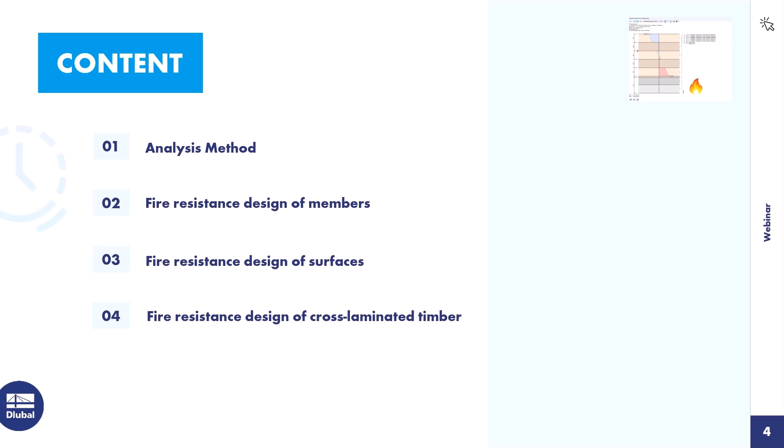We will not model anything today. We will switch to the program and I will show you the settings directly in the program. But the main focus today is the theory, so that you will understand what the background of the Eurocode is, how everything works with the charring and with the design afterwards. So we start with theory, then we switch over into the program, we check a few members, we check the design of surfaces, and at the end we will design cross-laminated timber for fire design. Okay.

So the first topic today is about the general requirements. This content here comes from the Bavarian building regulations, and I am sure it is similar in your country. It does not make sense to have a more detailed look into any regulations because we have so many people here from so many countries and every country is a bit different. But I guess in general this sentence says everything, so that's why I read it.

Buildings must be arranged, constructed, modified and maintained in such a way that the outbreak of fire and the spread of fire and smoke are prevented, and that in the event of fire the rescue of people and animals and effective firefighting operations are possible. And I guess it is clear to everyone that this is our big aim.

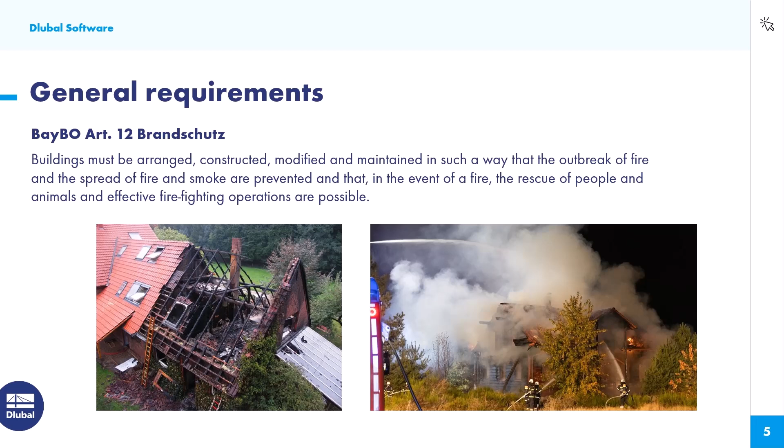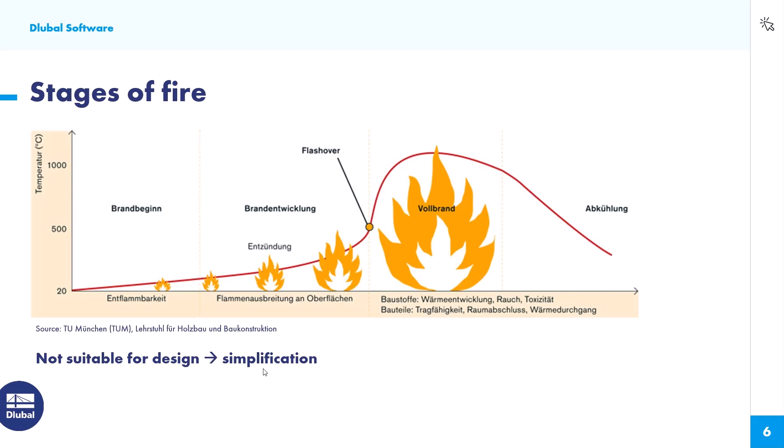Okay, so then we need to talk about stages of fire. The first stage is the non-flaming smoldering before it goes over to the developing fire stage. Then we get the flashover where we receive the fully developed fire before it comes to the decay stage. And of course, when we think about this red curve here, you can imagine that this is hard to simulate in a structural analysis. That's why we need a simplification, and how this simplification looks, you will see in the next slide.

It's the content of the Eurocode 1, of course not the whole content, but the important content. It's about nominal temperature time curves. Here we see the standard temperature time curve. There are a few more temperature time curves, but for timber and especially for buildings, only the standard temperature time curve is of interest. That's why only it is listed. We see the equation of the time curve. It's a logarithmic function, and the variable is t.

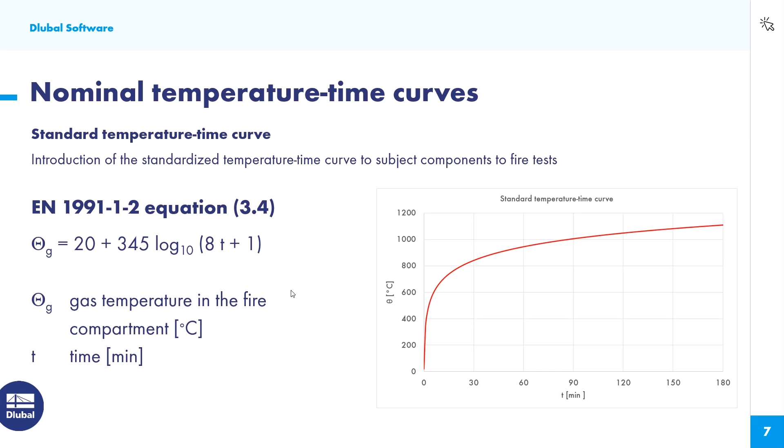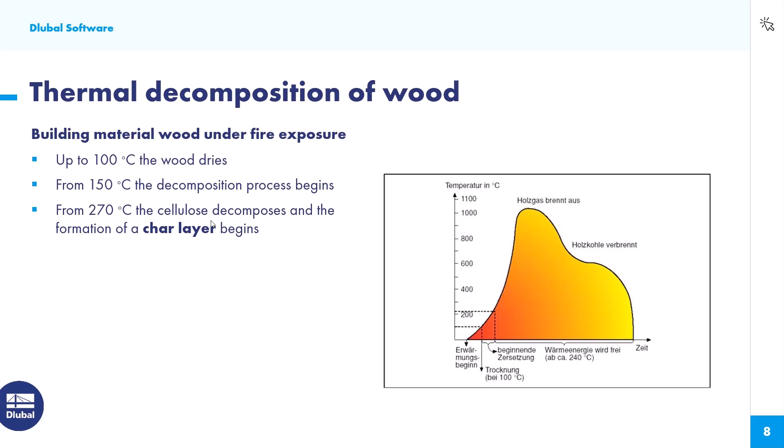The next slide is about thermal decomposition of wood. I guess it's clear to everyone that in the beginning the wood begins to dry. This is up to 100 degrees Celsius. From 150 degrees Celsius, the decomposition process begins. So we are around here. And it has its peak at around 270 degrees Celsius, where the cellulose decomposes and the formation of a char layer begins. And this char layer plays an important role, and it's actually the key for our timber design. That's why it's in bold letters.

A few properties of this char layer. This char layer has a lower thermal conductivity than unburned wood. That's why it delays the charring, and hopefully a residual cross-section remains. And that's the reason why we have a very favorable behavior during fire in case of timber. As you see here, when you check the cross-section after a few minutes, I don't know how many minutes these are, maybe 30 or 60, you will see that the timber inside is still brand new.

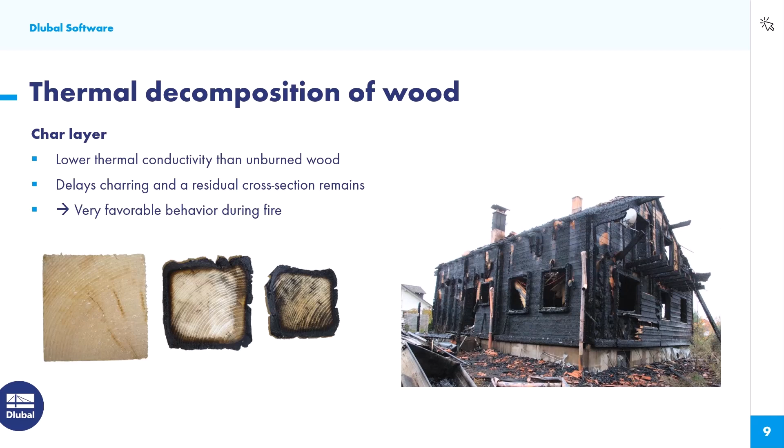Fire resistance classes. I don't want to spend so much time on it, since I guess that's clear to everyone. We have these classifications. We have load-bearing components and non-load-bearing components, but of course we are focusing on the load-bearing components in our structural analysis. And we need to consider integrity or not. That depends on, of course, the building code or whatever.

In the new Eurocode, this plays a more important role, and we are also focusing on it in the future, but for now we have no integrity. Or we do not prove any integrity, since it is actually not a design check in terms of structural analysis, but as I mentioned, it becomes a more important role in the new Eurocode.

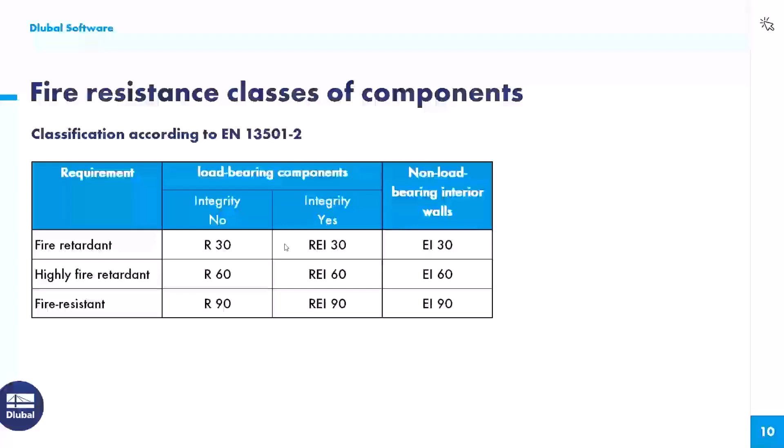Fire retardant, highly fire retardant, fire resistant. I guess that's clear to everyone. We talk about R30, R60, R90, R120, and so on. The indexes here are described on the next slides. I don't want to spend much time here. Please check the video afterwards and pause it. You will be able to read in detail what we're talking about. Today we're focusing only on the load-bearing capacity.

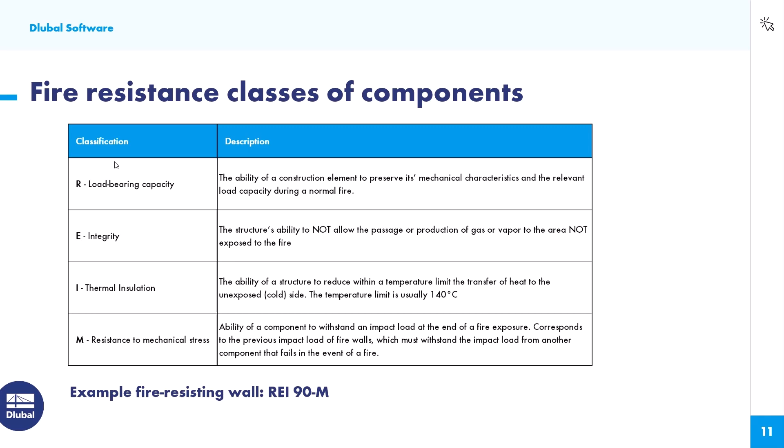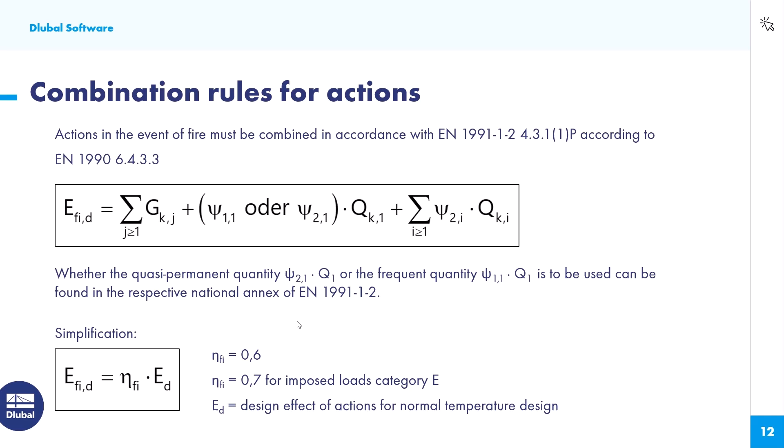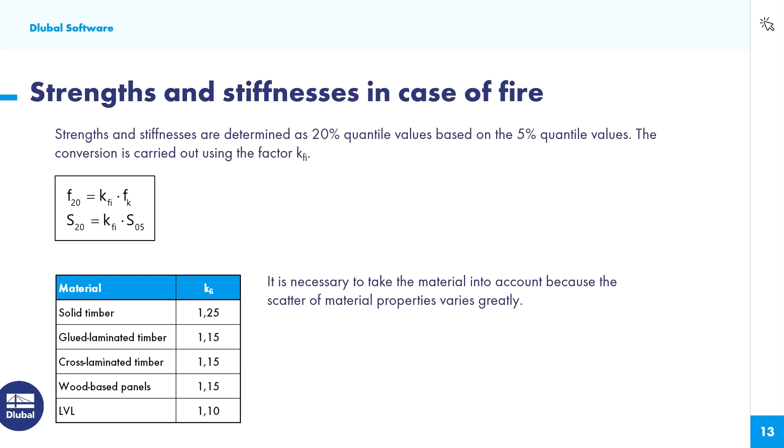And you see the 20% quantile value is dependent on the material. It depends on the scatter of the material properties, because it varies greatly from solid timber to glulam, for example. And I guess it's clear that the properties scatter because of branches, cracks and whatever. Okay, that's it.

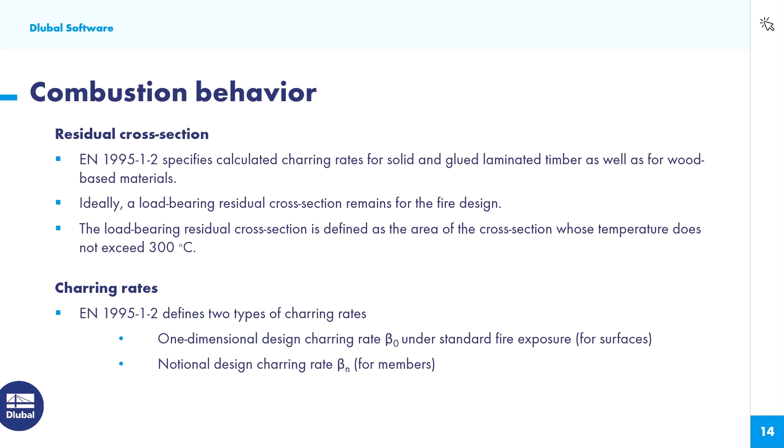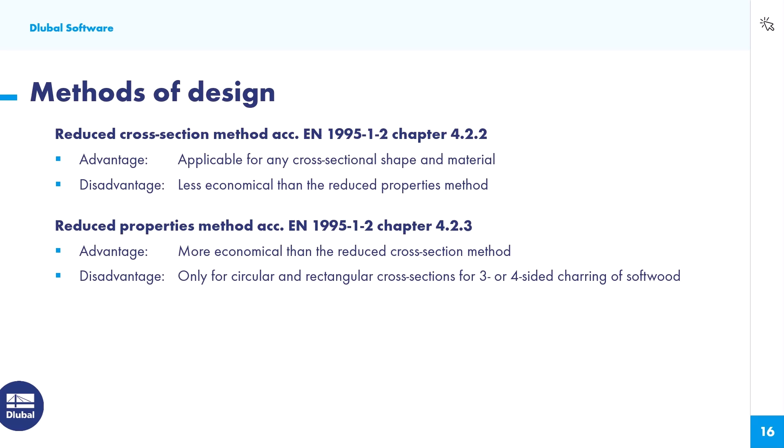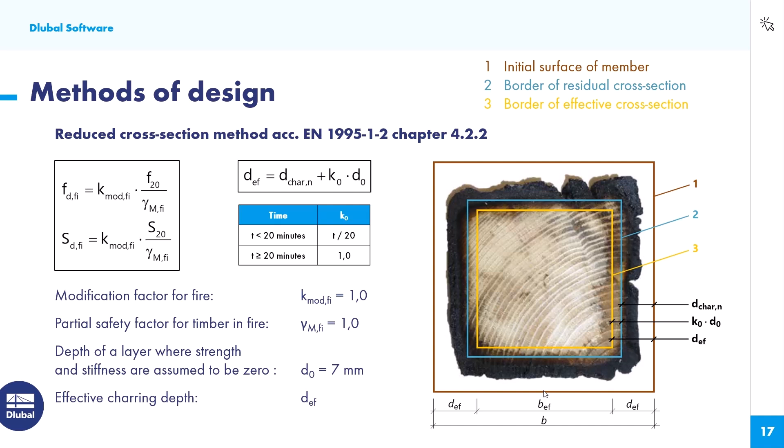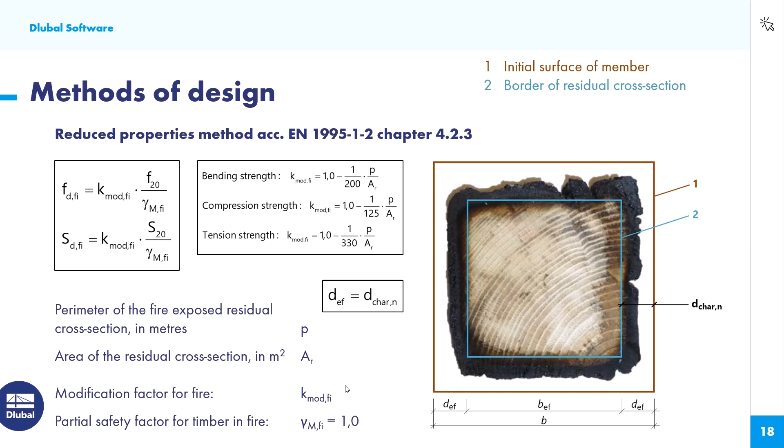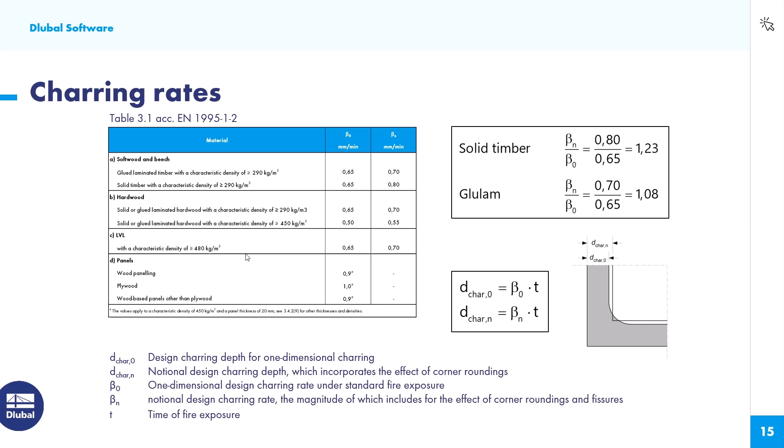Okay, that's it. Let's do a small example for this ceiling beam, which is softwood C24, 140 by 240 millimeters. Fire resistance period should be R30, and the charring should be at 3 sides: left, right, and bottom side. So we calculate our charring depth, multiplying the beta n factor from table 3.1. It's this table. Solid timber, which is C24, we have 0.8. Multiplied by the time, in this case R30, means 30 minutes.

We get 24 millimeters. And we additionally add 1.0 times 7 millimeters. And then we get an effective charring depth of 31 millimeters. Now we take the 31 millimeters 2 times and reduce it, and we get 78 millimeters for the width. And for the height, 240 millimeters minus 1 times 31 millimeters equals 209 millimeters. Actually, it's really simple. Okay, then let's switch over to RFEM.

So I'm sorry, maybe I should... I'm sorry. I have loaded the wrong files.

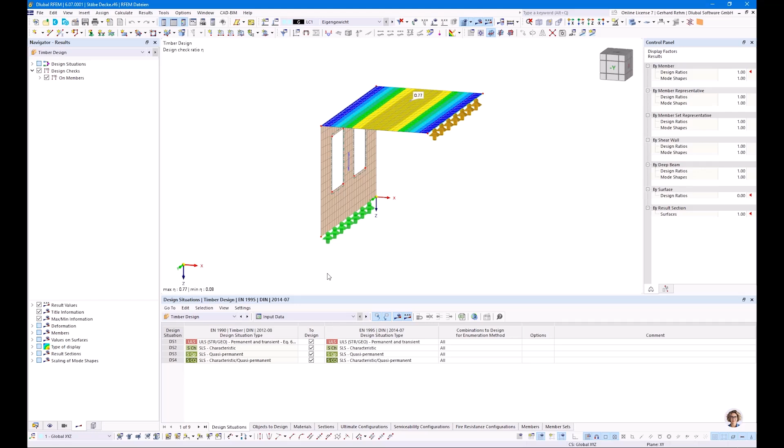Because they were already finished, and of course I want to start directly when our ULS and SLS design is fulfilled. So we see this floor here. I have shown this floor with different variants in another webinar, I guess a year ago or something. You will find this webinar also on our website. And now, of course, I want to extend it for fire design.

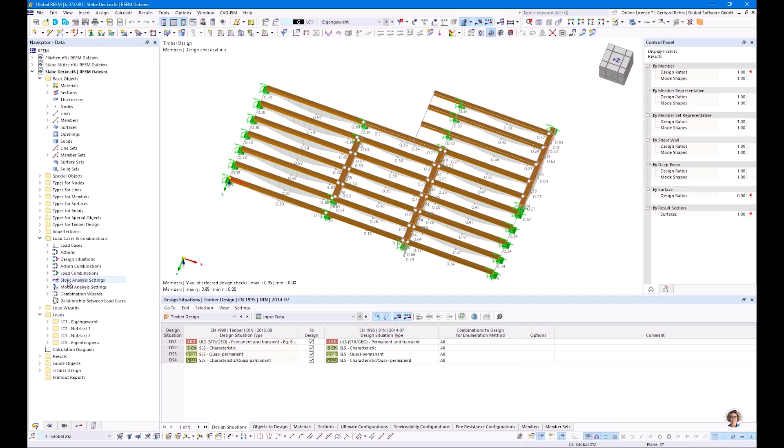And what we will do is we will add an additional design situation, because we need our actions in case of fire. Okay, so I added the design situations here, and I will add another design situation. In this case, I select accidental fire. Watch out, there is also accidental without fire, but this should be used for example for an impact load or something. In case of fire, please use this one here. It depends on the national annex.

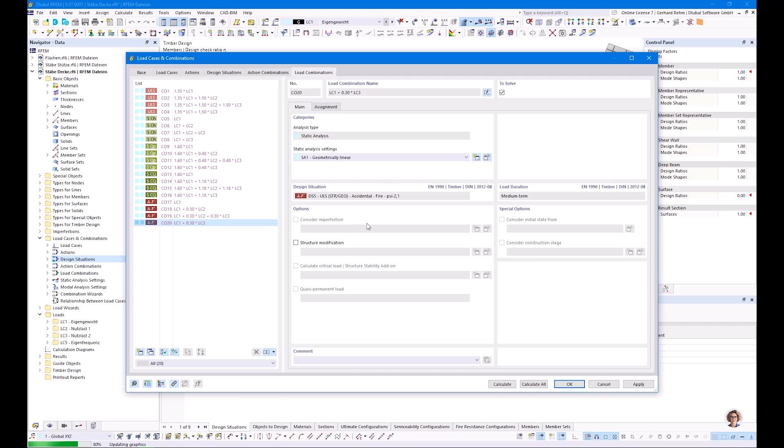Since we have only imposed loads, and I use the German annex, I will use psi 2 in this case. Okay, and then we get our load combinations for ULS, cold state, and also the fire state, where we have imposed loads, dead load, and imposed loads on different spans. Okay. Of course, timber design results need to be deleted. We want to add fire design here.

All right, let's have a look on the floor beams. In this case, fire resistance config was automatically assigned to it. So in case you don't receive any results for fire design, please check if a fire resistance configuration was defined here. Let's have a look on it. Okay, so there are different tabs for members, surfaces, and some standard parameters. So in this case, it's exposed to fire on 3 sides, so not the top side. And we check it against 30 minutes.

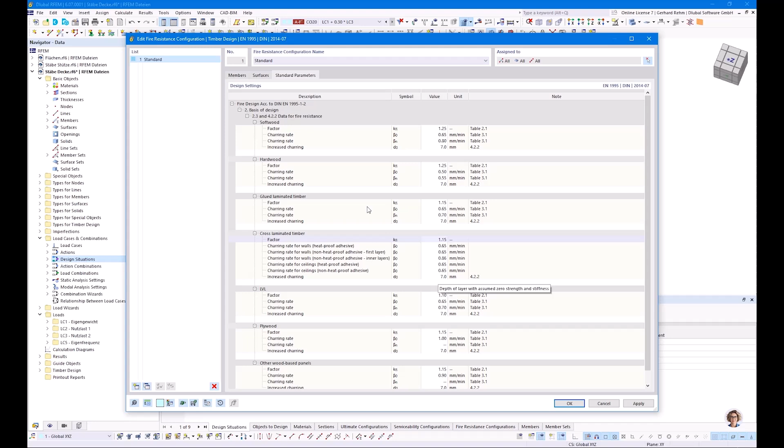And when we switch to standard parameters, you will see all these beta factors for different wood and for different timber material. Okay, and you are able to change these values in case of some special settings from some special approval or something. Okay, so that's actually it.

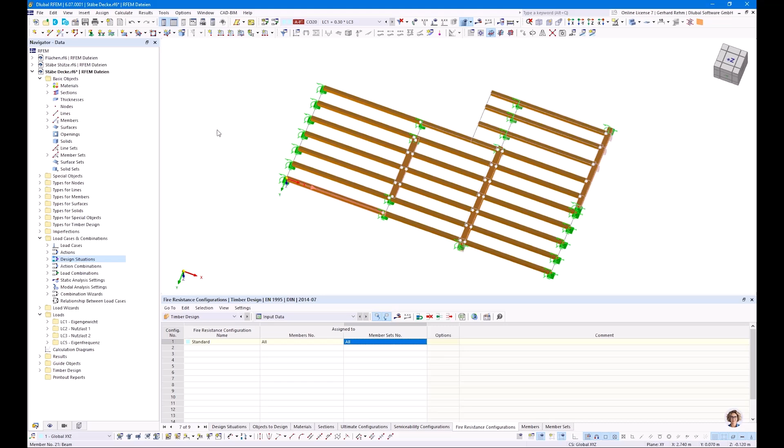So here we can also check which fire resistance config is assigned. So in this case, this config 1 is assigned to all members and all member sets. Of course, if some member has a different setting, you can simply switch it here in this design configuration tab. And here you can also create new configs. Okay, so that's it, I guess. For now, I will run the analysis.

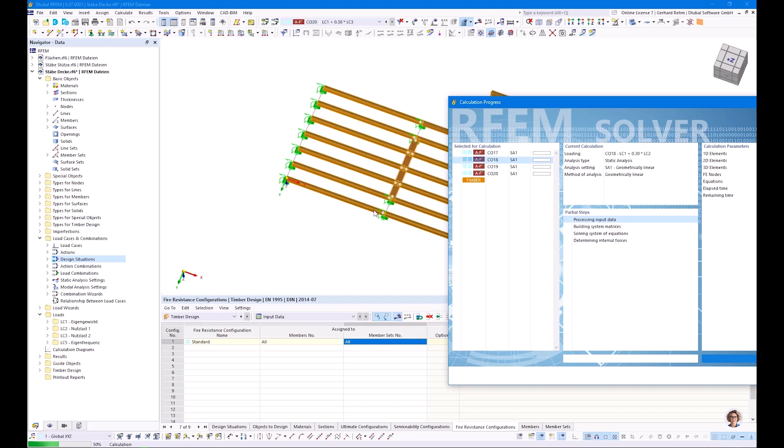And then we will check and compare, because the floor beams here, the ceiling beams, have exactly the same section like my hand calculation. So we had 140 by 240 millimeters. Okay, so let's focus on, it does not matter. We don't take care of the numbers for this example. Let's check this member here. And we check fire resistance. Let's check bending. And let's have a look at it. So it's not so, so interesting.

We only see how the characteristic value is transferred into the 20% quantile value. So we increase the strength, the characteristic one, by factor 1.25. So that's okay. And k mod fire is 1.0, and also the partial safety fire factor is 1.0.

Here we get the information about the fire resistance. So we have a t required of 30 minutes, and we have beta n of 0.8 millimeters for this material, multiplied by 30 minutes equals 24 millimeters. We add additionally the 7 millimeters, and we get an effective charring depth of 31 millimeters and an effective section of 78 by 209 millimeters, which was exactly the same value like in our example here. Okay.

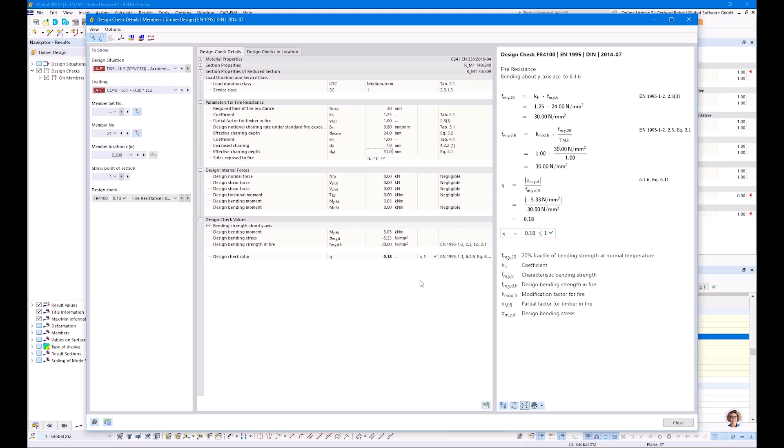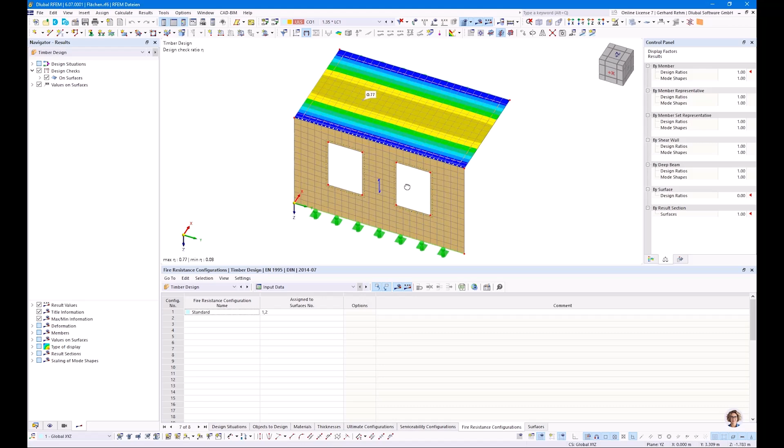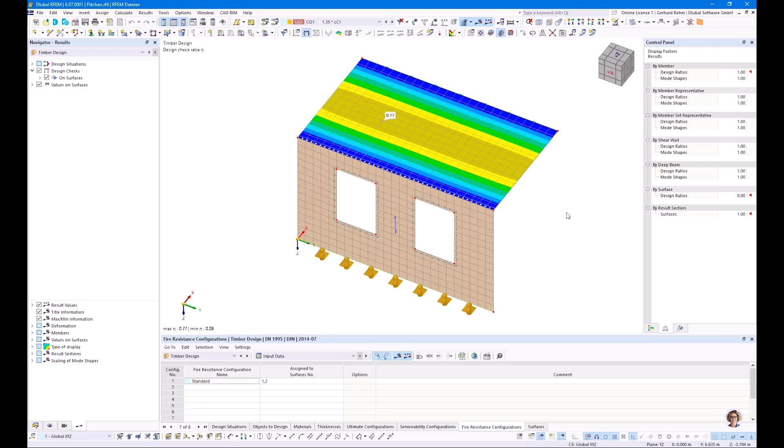Let's go directly to the next example. It was this one with surfaces. So there's a small additional building next to another building, but the other building was not modeled. So that's why I have this fixed support here on this side. There is a line hinge here on this side, and there is a support here on the wall on the bottom side.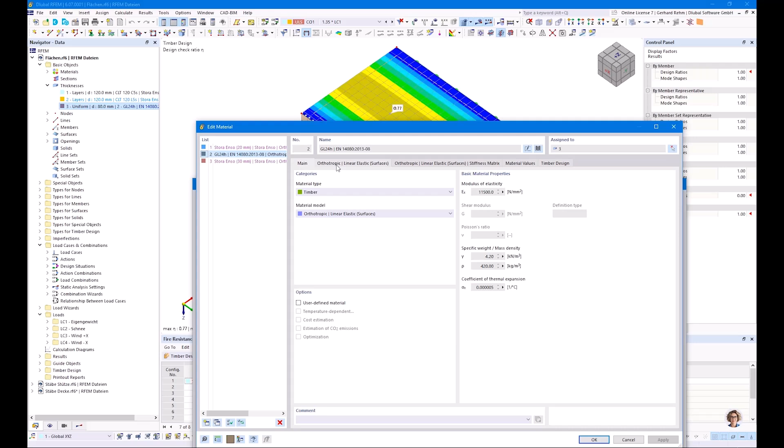So this floor here was made of an 80 millimeter glulam floor. So it's an orthotropic material model. So let's have a quick look on it. So I've switched to orthotropic linear elastic surfaces, where we have a different modulus in X and Y direction. Of course, this is made of multiple pieces of glulam. So maybe 80 by 625 millimeters or 620 millimeters or something.

And of course, there should be no moment transfer in Y direction of the surface, but since we span it directly in one direction, there is no big difference. Of course, if there is another support here, then maybe we should think about reducing the stiffness in Y direction or adding some line hinges, but for this example, it's absolutely okay.

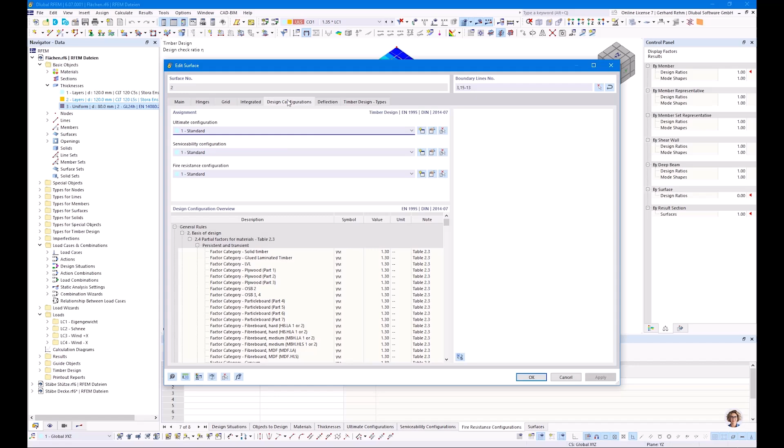Okay, so what I have done here was I have defined some fire config for surfaces. So we check it. Let's check it against 90 minutes. To make some extreme example, you can imagine we have 80 millimeters and we expose it to fire for 90 minutes. Yeah, you can imagine what happens. And we want to have the fire only exposed on the bottom side. So that's all what we enter for now. We come to all other settings later.

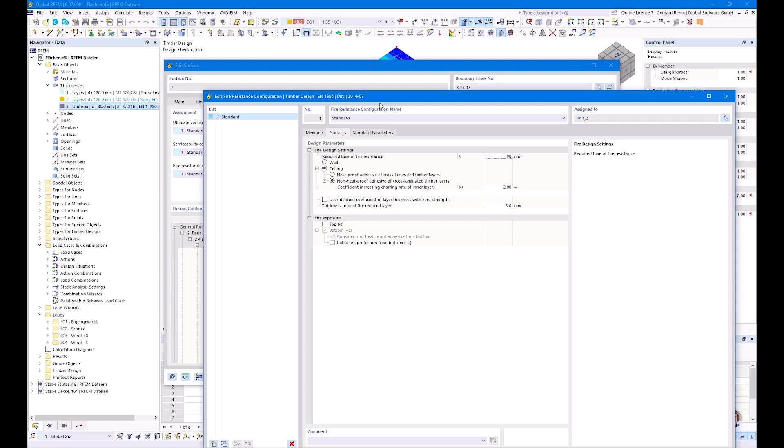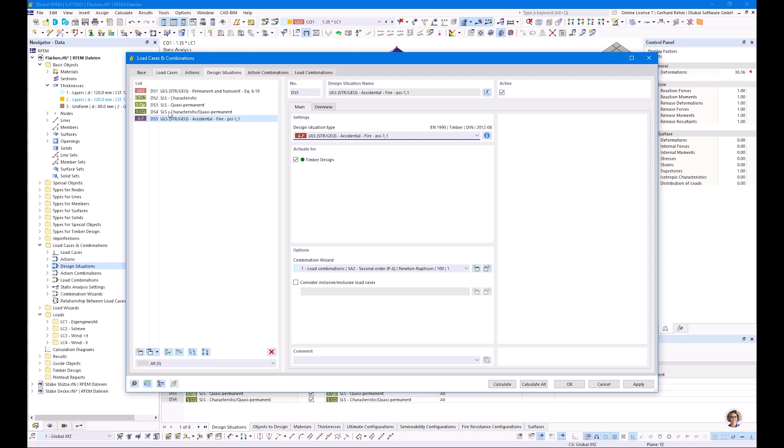Okay. So we need also this design situation. I will add a new one here. So in this case, I select this one because wind is also considered here. So we have dead load, we have snow load and wind load, and we have a really high dead load because I have defined 2.5 kilonewton for load case 1 in this example.

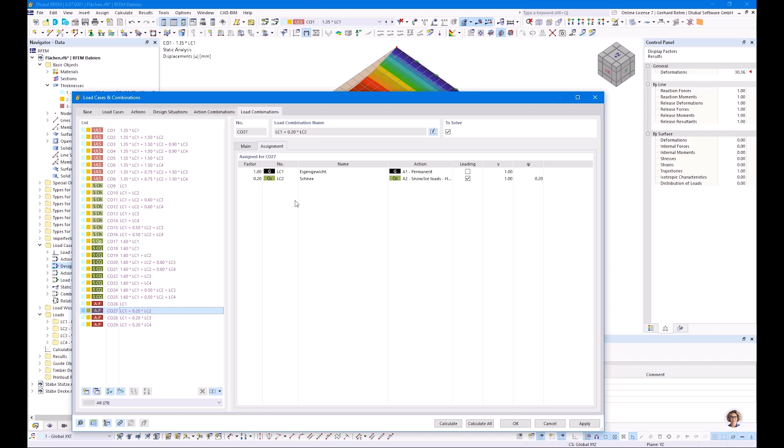Okay, let's check it. Yeah, we have load case 1, load case 2, which is snow, load case 3, which is wind, and load case 4, which is also wind. As I mentioned, for the German annex this load combination can be neglected, but for now I'll leave it. Okay, so that's actually all.

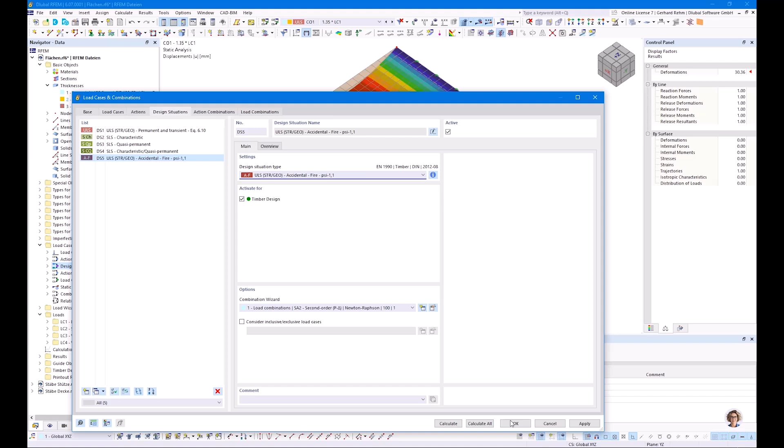Oh, sorry, I forgot to create it. A minute. I hit the cancel button and not the OK button. That's why it was not saved. Let's use the first one. Okay, that's actually all. We focus only on the floor for now. I start the analysis. And then let's check what happens.

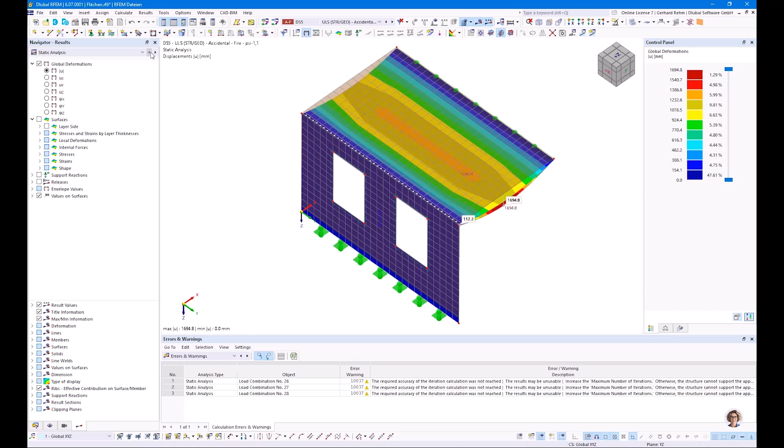So maybe have a focus on this diagram here. You see already the deformation becomes extremely high. So we are around 1 meter 30, 1 meter 40 deformation. And you see there are some errors, but fortunately we get some results. But of course, when we check the deformation for this load case, the maximum deformation is 1 meter 70. The span of the floor has only 3 meters, so it's 50% of the span length.

And I guess it's clear that no firefighter will enter this room when he sees that the floor will deform like this. But at least we get results. But watch out, it can happen when you don't take care of it. Of course, nobody would apply 90 minutes to an 80 millimeter panel. So it can happen that the structure becomes unstable, especially when we talk about P-delta analysis, so second order effects. Then of course the critical load factor plays an important role, and the structure becomes unstable under some circumstances. This needs to be considered.

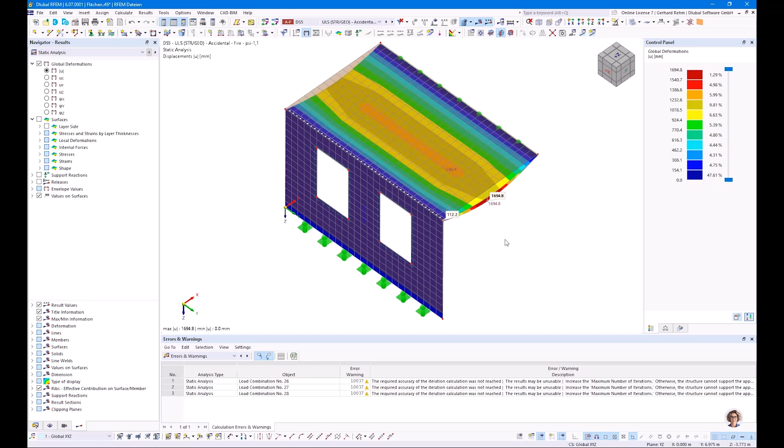Okay, so in this case, it's clear this floor will definitely not work. And when we check the ratios here, you see directly the ratio is extremely high. Let's check it directly. We have the charring depth here calculated, and the remaining thickness of the surface is 14.5 millimeters. You can enter and see each intermediate value here in this dialog. But there's also this diagram here on top, or also when you close it and click here.

And then, let's switch to the stresses. You will see we had the 80 millimeter, and the remaining effective thickness is only 14.5 millimeters, which is of course too low. And the charring depth here can be seen as 65.5 millimeters. And now the question is how we can fix this. Of course, we can increase the thickness of the surface, but there is another way we can consider.

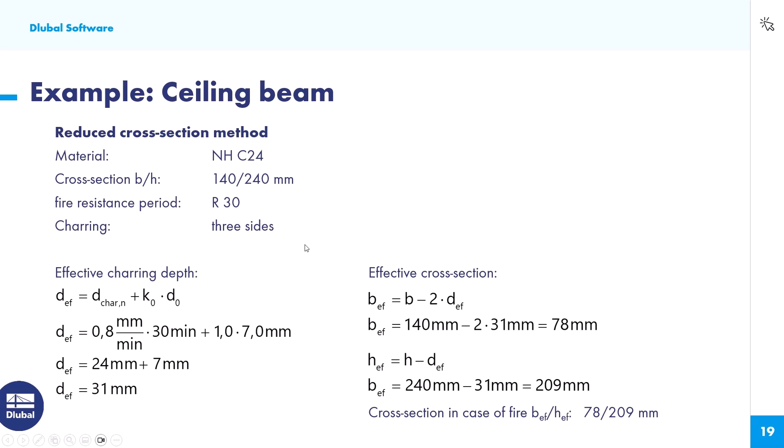So let's go back to our PowerPoint. And now we talk about initially protected components. As you can see, this is, I guess, the most common case, to cover it with gypsum boards. The advantage in this case is we save time, because the gypsum boards, or all other claddings, cause a delay. So the timber will start to burn much later than without this cladding. Of course, it always depends on whether the timber should be visible or not. But in case it's not visible, we can apply such claddings.

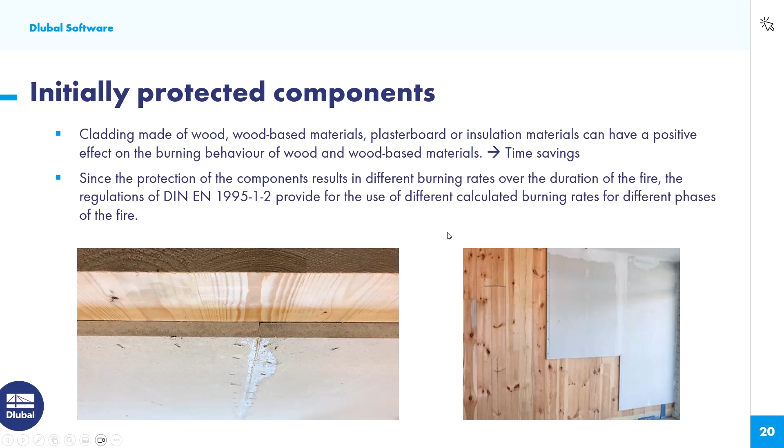The Eurocode describes different stages or phases of fire, and we will have a look at it in detail now. Maybe you have seen similar diagrams like this. So curve 1 is the charring rate for the unprotected surface. That means we have a linear charring rate; in this case, that's the charring depth. It's nothing else than beta 0 multiplied by the time, and of course it is linear. And the timber starts to burn exactly at t equals 0.

And now we come to this delay when we use some protection. Here we see two different curves, curve 2 and curve 3. We will talk about both curves in detail on the next slides. Here you see the time of the delay of charring due to protection equals the failure time of protection. That means the protection will fall down from the floor, for example. At the same time, the fire starts on the timber.

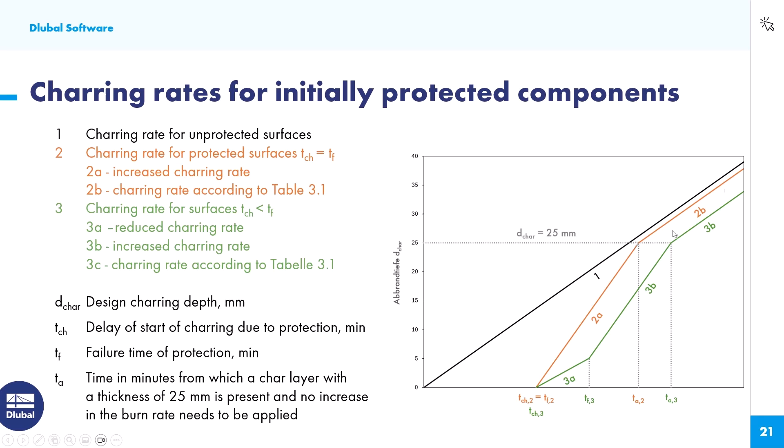And after the protection is gone, we will have some increased charring rate again. You see here we have this 25 millimeters limit, and after these 25 millimeters the normal charring rate will continue. That's the time TA, and this time is actually the time in minutes from which a char layer with a thickness of 25 millimeters is present, and no increase in the burn rate needs to be applied anymore. Okay, let's have a look at it in detail.

So for wood-based panels and gypsum plasterboards type A and H, we can use this curve number 2, where the charring time equals the failure time of the protection. For wood it's simple. We can simply divide the panel thickness by the charring rate, and then we know the time. For the most common case, using gypsum plasterboards, we have equations in the Eurocode for filled joints or gaps smaller than 2 millimeters, or for gaps larger than 2 millimeters.

So for a typical 12.5 millimeter plasterboard, the charring time here is 21 minutes. So the fire will start 20 minutes later. But as you can see here, we have an increased charring rate afterwards. So at the end, I guess this was 60 minutes, we don't save much time, because here we can consider a linear curve, and here it's bilinear. So we have an increased charring rate here.

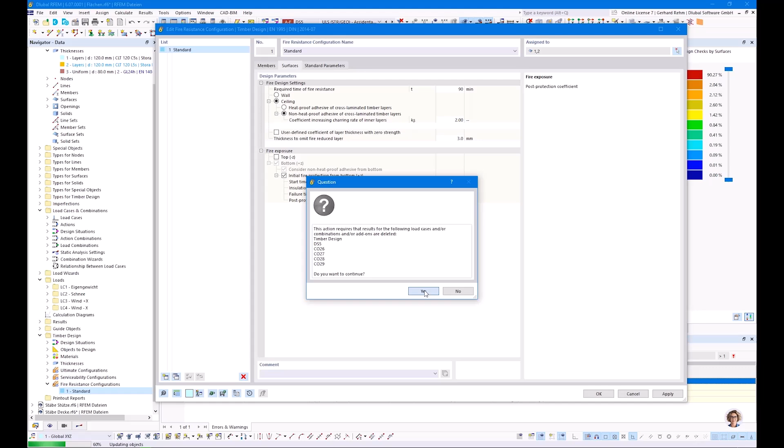In this case, let's start with tf equal t charring, and this increasing factor K3 should be considered with 2.0. So, okay, we need to recalculate everything. As you saw, also the internal forces and the results from the load combination for the accidental actions got deleted, because we sent the reduced section to the solver. So all the stiffness is considered with a reduced stiffness for surfaces.

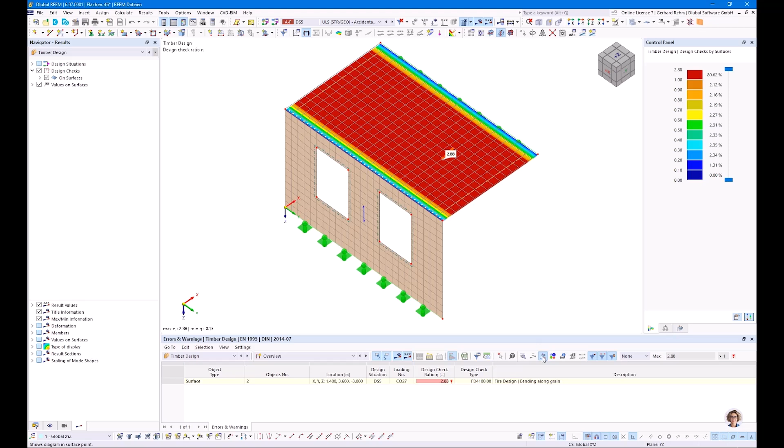Okay, when we run the analysis again, before we had an effective section of 14.5 or 14.8 millimeter, deformation was at 1.69 meters. Now we get a deformation of around 1.30 meters or 1 meter or something, a ratio of 288%, of course, still too high. Let's check the thickness. Okay, we won 1 or 1.5 millimeters, so not really much.

Okay, let's go here to surfaces again, and maybe let's try the value from ÖNORM or from the global Eurocode. Let's switch to 31.5 minutes. But sorry, my mistake. It was for the walls. In this case, we should consider the floor. Maybe better to use two-layered. So this is this cell here. It's 1.4 multiplied by 2 by 12.5 millimeters plus 4. Becomes 39 minutes. Okay, so maybe better directly to use 39 minutes here.

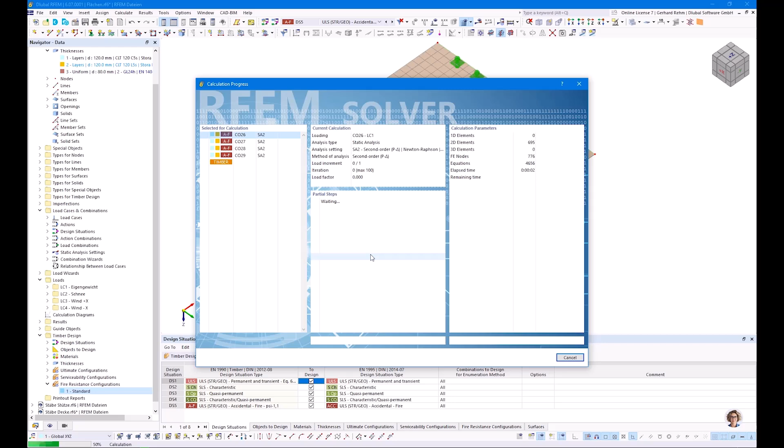And then let's see how far we can go, and maybe we come close to the 100% ratio. Okay, the deformation is at 30 centimeters, which is not too bad in case of fire, and the ratio is close to 100%, so it's 1.31.

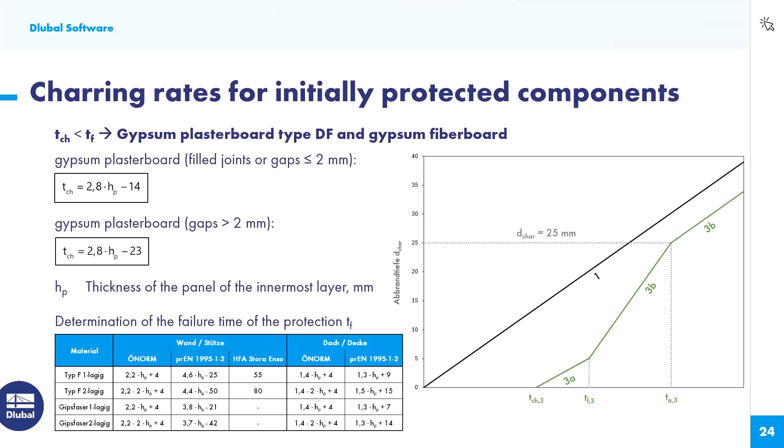Since we have already 2 layers of gypsum board on it, maybe it's worth to think about increasing the thickness of timber a bit. In this case, I'm nearly sure an increase of 100 millimeter glulam will be enough in this example. But okay, that's okay for now. Time is running quick. Maybe switch over directly to the slides and have a look on CLT, which has some special rules.

Before I start with CLT, as you know, it's not directly regulated in the current global Eurocode. It is covered in a few annexes like the German and the Austrian one, but this design is not part of any annex. So this is actually the current state of the technique, and it will be also part of the new Eurocode, and it is also already in some approvals from producers. So for example, Stora Enso, they use this approach, and also a few others.

Okay, so first we talk about linear charring. That's nothing else than our solid timber. So same rules. The only additional rule is for CLT and linear charring, layers smaller than 3 millimeters should not be considered anymore in the design, because the charring is of course not perfectly symmetric over the whole surface, and that's why it's better to neglect layer thicknesses smaller than 3 millimeters.

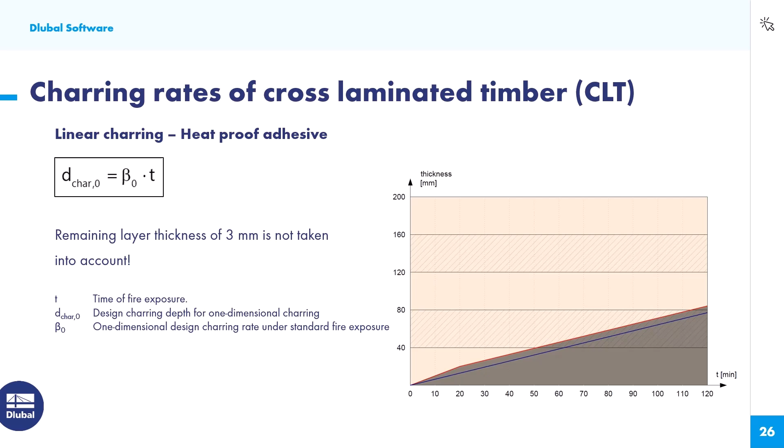And the linear charring can be used only for heat-proof adhesive. Mostly this is not the case for CLT, so I don't know any producer. Maybe there are producers which use heat-proof adhesive, but it is more common to use non-heat-proof adhesive, like the polyurethane adhesives. In this case, we need to consider a non-linear charring, because the temperature influence on the adhesive causes delamination.

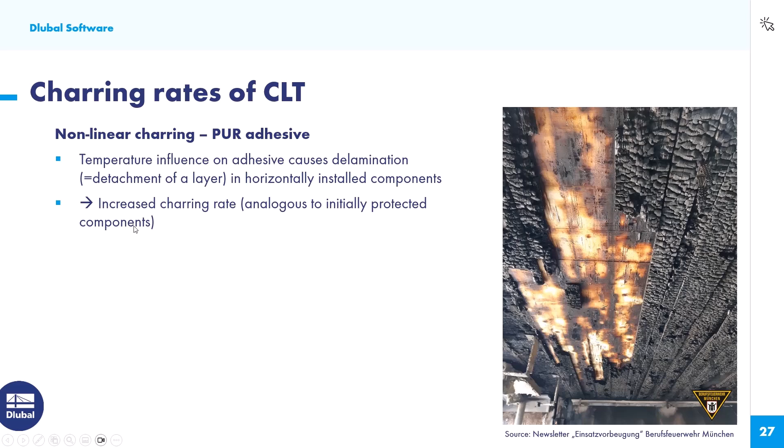Similar actually to the initially protected components, there we use the same approach, and you will see on the next slide. This is the stair model, sometimes called, where we have different areas as well. So the first area is here A. Here we consider a normal charring rate with beta 0. Most approvals use 0.65 millimeters per minute, but other approvals maybe use 0.7. It depends always on the approvals.

Yeah, so the first area is 0.65 millimeters, for example, per minute. And then we come to the second layer. So let's assume, okay, the layer falls down. So the timber behind is already treated with a high temperature. That means we get an additional increased charring rate. In this case, we call it K beta. So it's also factor 2, similar to the initial.

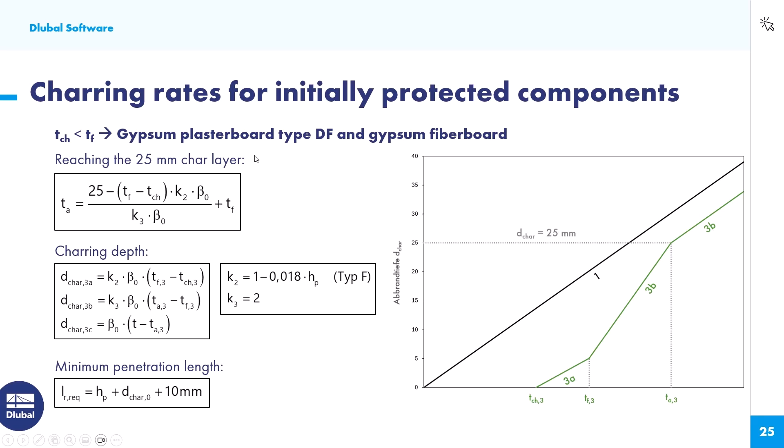Let's switch to this slide, to this initial protected components. And here we go. Then when the char layer actually reaches 25 millimeters, we can continue with the normal charring rate, and then it starts from scratch. So from here again, and so on. But of course, this is 120 millimeters, and you see for 0.65 millimeters, we get an effective charring depth of around, let's say, 110 millimeters or something. Let's have a look on it in detail afterward. Okay, also the 3 millimeters should not be taken into account. And this is for roofs and ceilings.

For walls, of course, the gravity plays an important role when it falls to the side, for example. Here we also have a bilinear curve, but we do not have such a high increased charring rate. So the first layer will be burned by 0.65 millimeters per minute, for example, and the second and all following layers get a charring rate of 0.86 millimeters per minute. In a few approvals and also in literature this value is recommended to use. Also, 3 millimeters should not be taken into account. That's clear.

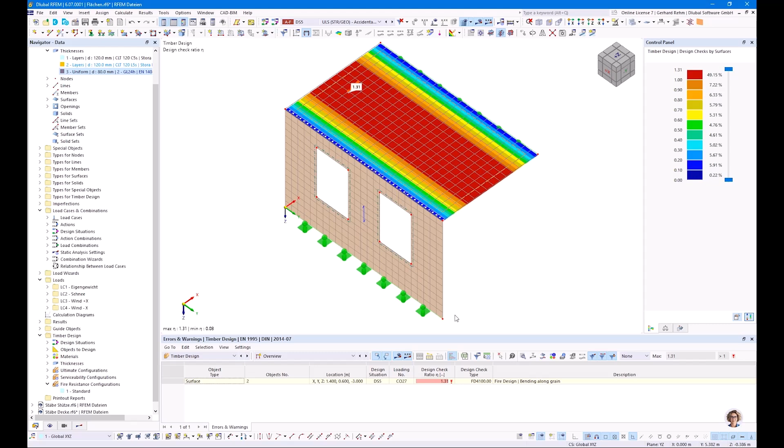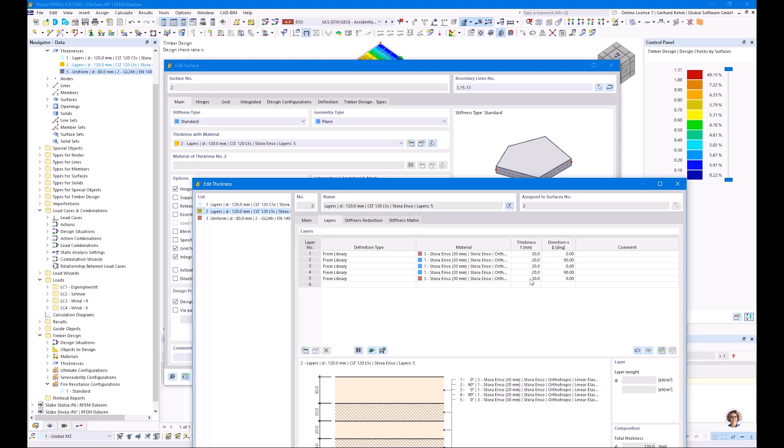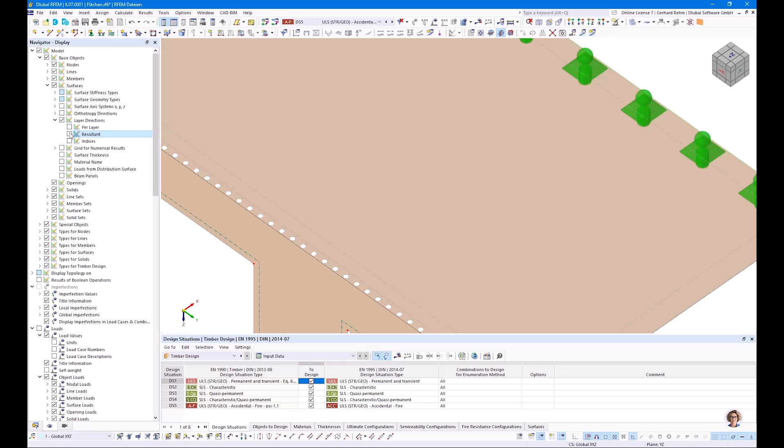Let's have a look into the program again. So I will replace this layer by layer number 2. I have prepared it already. It's a 5-layered Stora Enso composition with 30, 20, 20, 20, 30 millimeters. The span direction can be checked here with these blue arrows. You will find them in the display navigator, surfaces, layer direction, and I display the resultant. Of course, you are able to also add per layer and with indices, and then you will see directly the layer direction. But for this example, I prefer to see the resultant stiffness direction.

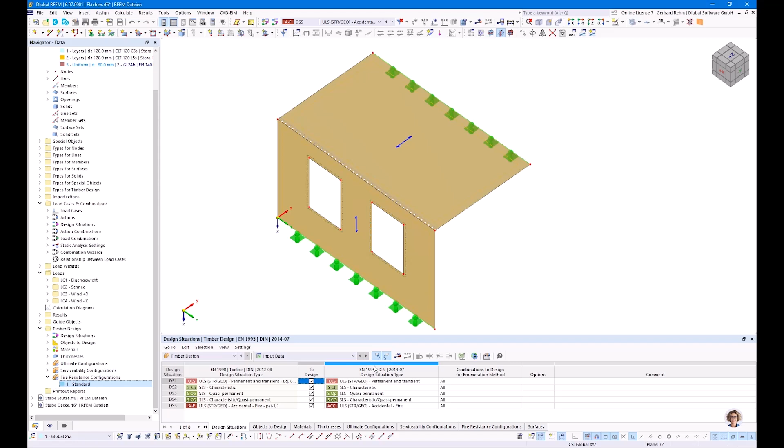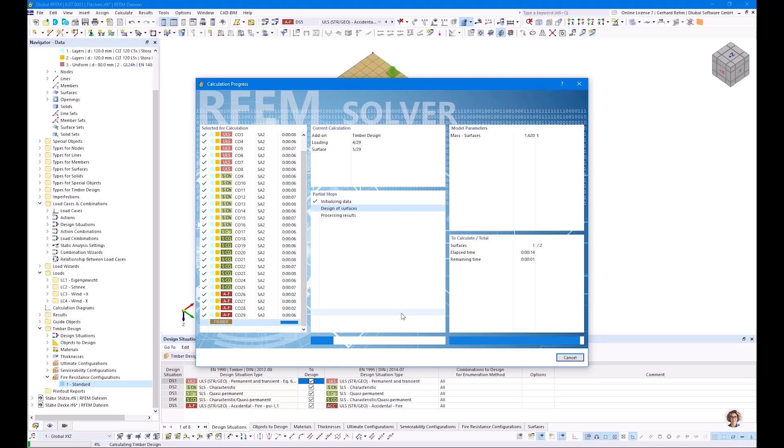Let's have a look on it in detail. So we check the charring depths and we get the information directly. Layer number 5 fails, number 4 fails, layer number 3 fails, and layer number 2 will be reduced to 12.6 millimeters. Of course, it's much easier to see the effective section here in this dialog. Maybe we switch to stresses again. You will see 77.4 millimeters will fail, 30 millimeters on top will remain, and on the second layer, 12.6 millimeters will remain. But since this is the transversal layer, it is not able to support the first layer. That's why the stresses are only considered on the top layer. And this helps us a lot to understand the effective section.

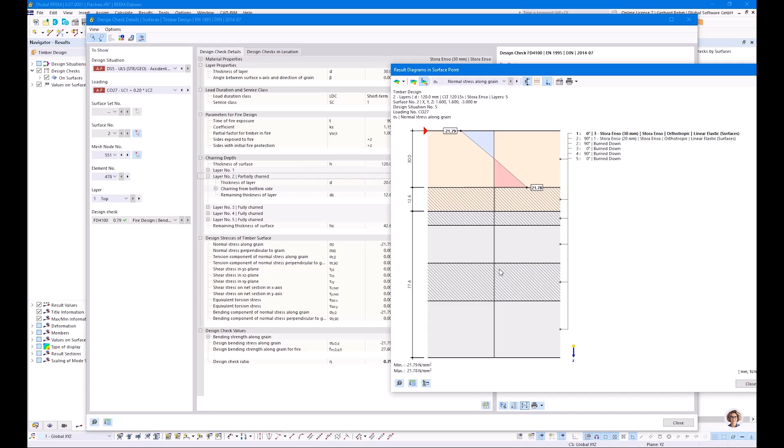But of course, I agree, to check the charring rate inside the tables is sometimes a bit tricky. You can check each intermediate value, but it would be much smarter to see it graphically. That's why we are introducing now, finished in a few weeks, this time course monitor, where you can see the charring depth over the time. This helps you a lot to understand and compare it with my slides in the PowerPoint presentation.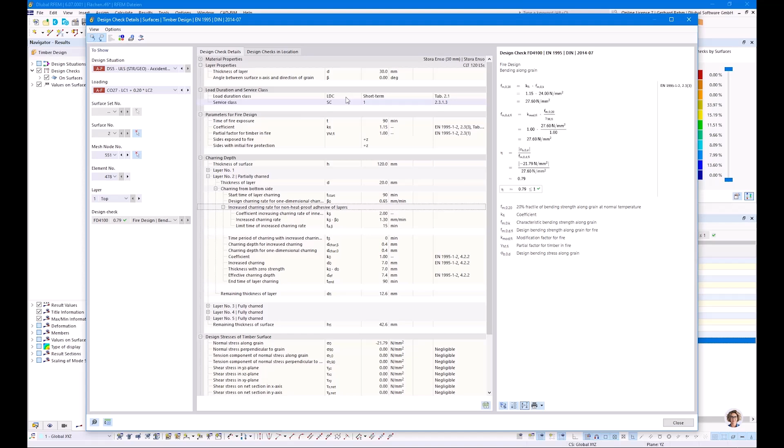On the bottom side, we see a protection, and here it's the same. We start with an increased charring rate until we reach the first or the second layer, and then we continue with this 0.86 millimeters or whatever you have defined in the fire design config. So here you will see it for cross-laminated timber, dependent on whether you have heat-proof adhesive or non-heat-proof.

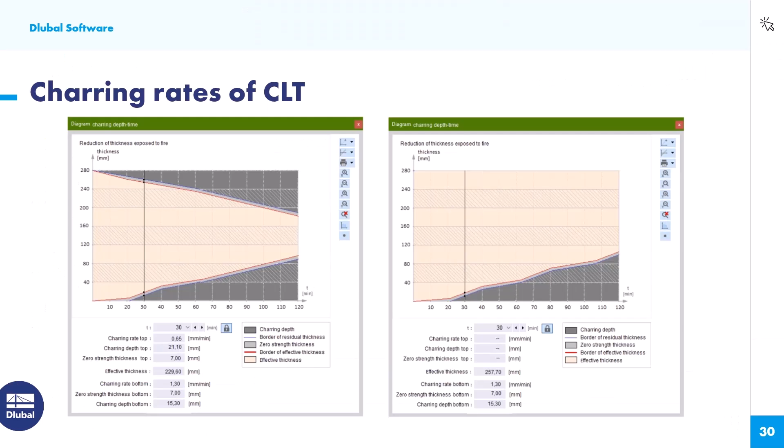Oh, I forgot to show you. Here in this surface dialog, you will find the distinction between wall and ceiling. When you select ceiling, this approach will be used. And when you select wall, this approach will be used. Of course, the program does not know if this is a wall or a floor. This needs to be a user input. And dependent on the setting here, you will get this.

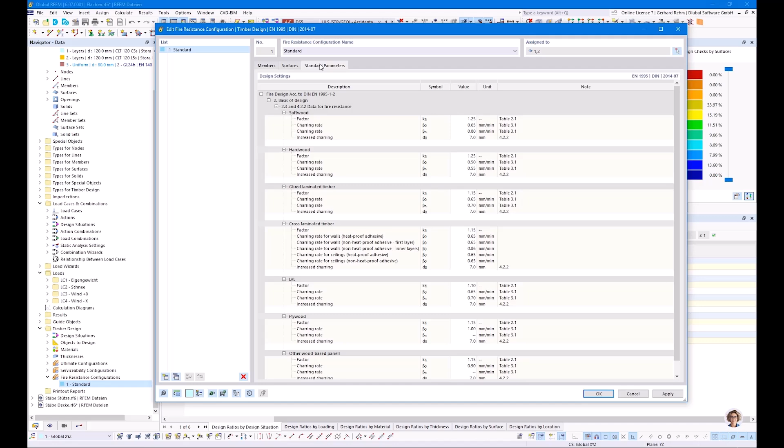Time is already over, but I will show you the wall configuration. You need to create a new fire config. So I create a new one. For surfaces, you can switch over to wall in this case. Define your required time and your settings, and if it's exposed on the top or bottom side. Top is always -z direction and bottom is always +z direction.

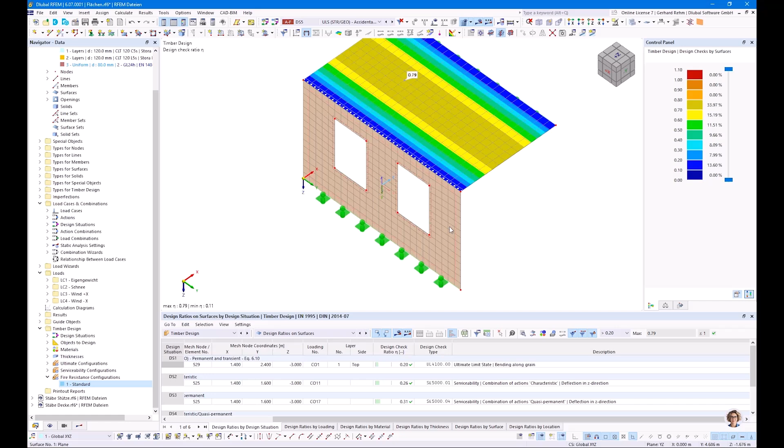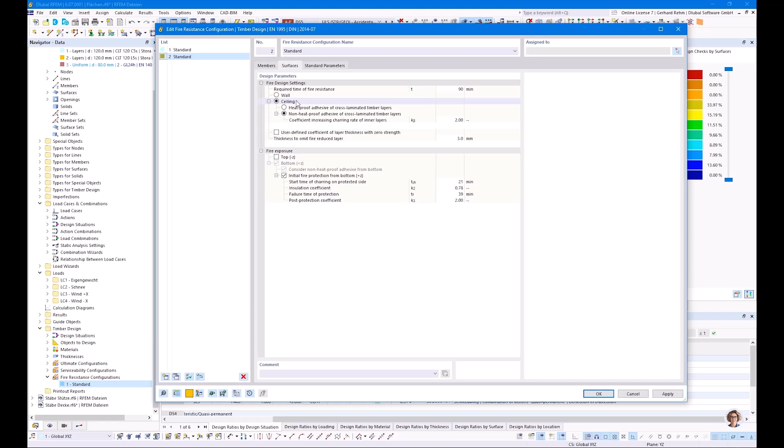When you right click on the surface, you can activate the local axis systems here, and then you see plus is in plus direction and minus is in minus direction. And don't forget to, wait a minute, I forgot it. I will switch over to wall. Maybe I don't want to create a new one, I want to create a copy, and I will switch to wall. Okay, and now I have assigned the wall config to my wall.

Okay, so for now, that's it from my side. I'm thinking about doing another webinar on this, especially about wall design and buckling design of CLT. We already had a webinar about buckling design of CLT in RFEM 5, which can actually be carried over to RFEM 6. But maybe in the future, I plan to do a webinar where I also show the eccentric effects and the buckling effects on these walls.

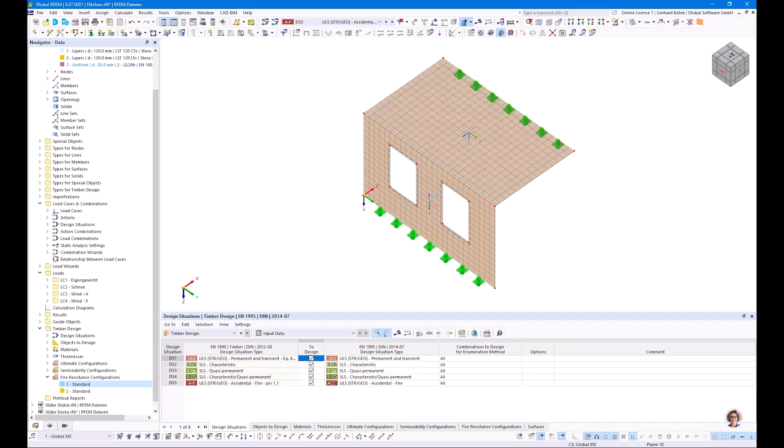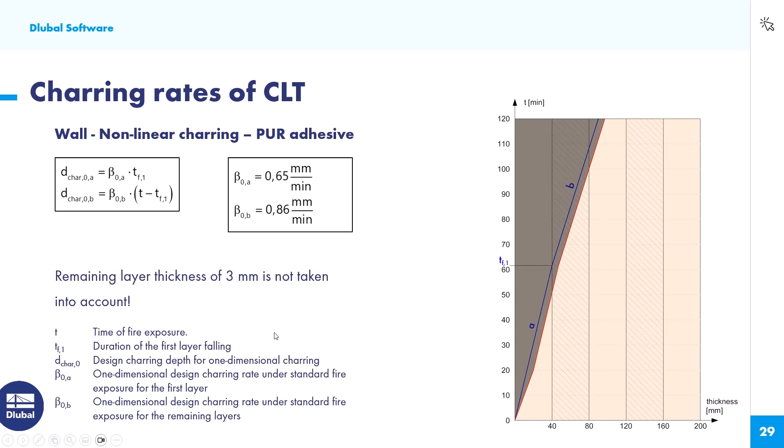As you saw, it was really focused on this PowerPoint, but I was focused on providing all this information to following users who watch the webinars to learn about fire resistance. This helps the user 24/7, and it helps us in the hotline, where we don't have to answer the questions, because you can check it out in this webinar. Hopefully I fulfilled your expectations, and that's it for now. Hopefully I did not forget anything.

Maybe some words on literature recommendations. Unfortunately, I'm not familiar with English literature, I know only the German ones, because the German ones are already really good. I'm sure there is English literature, but I have no clue about it. Maybe you can send me some English literature sources, and then I can add them to this PowerPoint later.